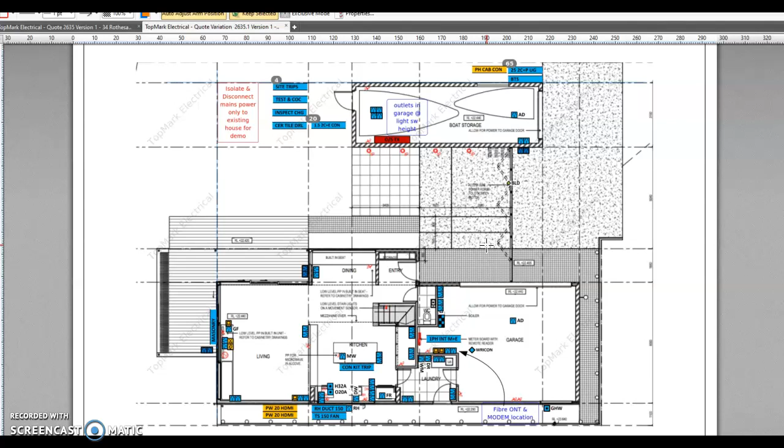So that's the power point layout, nothing to look at there. I'll come back to that floor, but this is the ground floor. Basically, the LED strip lights come on with a sensor. They're wired to the entry so you can turn them off and on, basically as an override. The boat shed is pretty self-explanatory.

When you come into the entry, you've got this light in the entryway switched right at that location, and you have the pendant on a separate switch. What Mark was saying is it's probably not about when you'd have the pendant on or off, it's more about being able to turn the entry light off, because if you're living in the house, you don't always want the entry light on. So there's two switches, one for the pendant, one for the entry. You come in, turn the entry light on, it provides enough light, and you can turn the pendant on if you want.

It's up to you, but you come through there, and then you have these two hallway switches, which are switched to this location with the dining room switches. The reason those are switched to that location is if you're using the kitchen and all the kitchen lights are on, you'll see these lights come off the kitchen light. If you decide to go to bed and start walking up the stairs, this is the closest location to switch these hallway lights off before going up.

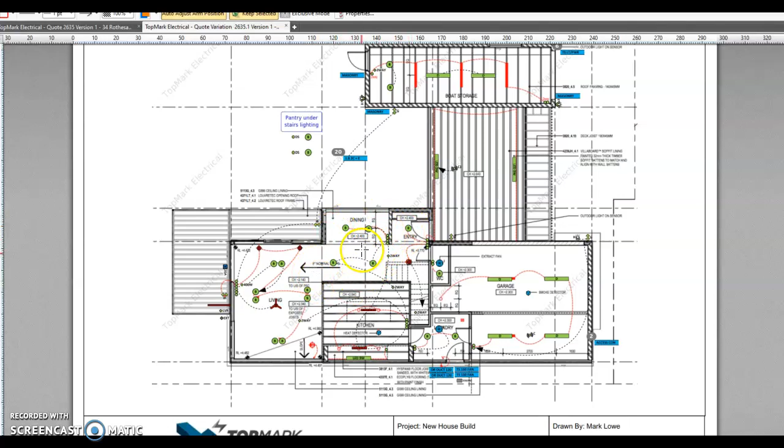The upper floor, I'll just remove some of these notes. Actually, I won't, I'll leave them there. Master bedroom, pretty simple - four lights, switched from this location as well as next to the bed with the wall lights. Now there's only a two-way on this side of the bed.

So at night, whoever's on this side will flick these off and flick all these lights off. At this location too, there's a possibility of adding one more switch for the Econo heat panel, or my suggestion would be to have the switch near the Econo heat panel, maybe hidden slightly behind it. Because you're not really going to turn that on and off manually, there's an app you use, or you just go to where the heater is and flick the switch.

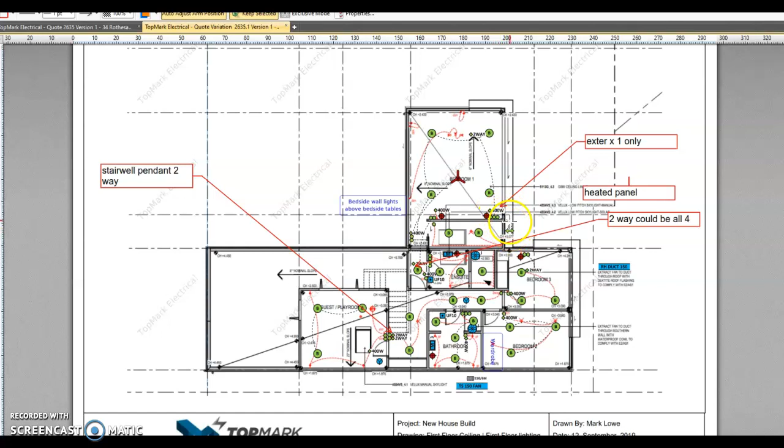I don't think having another switch over here would be the answer, but it's your option. Mark did suggest either or. Wardrobe lights, pretty simple - door slides open, light, bang bang. That's fine. This exterior light's also controlled from this side, so I think that's the logical spot to put it, because you've got a big door in there and I don't think there's any wall space to put it on.

Now I'll just hide that note. The ensuite's fine, bedroom 3 is all good. There's a two-way there because if you do put a mezzanine structure in there, you've got a two-way switch. This bedroom's fine, bathroom's fine. The hallway lights, you've got 1, 2, 3, 4 lights which are on a two-way switch to that point there.

So if you're coming up, you switch them on, walk around, and then have the ability to switch those two-ways off there. So that could be something that you delete. I think just having the switches at this location for the hallway lights - because if you turn the lights on and you're walking through this way, you then have to decide whether you go this way or come down to turn them off. So it's much of a muchness really. That could be something you get rid of, the two-ways in the hallway.

Now the other two-way isn't for the guest playroom, it's for the actual pendant light above the stairs. That kind of leads into what I was saying before on the ground floor. If you have that pendant on its own switch, you could decide to get rid of this two-way and just say, if we turn the pendant on downstairs and it's on, then it's on - if we have to turn it off, we go downstairs and turn it off. Or you keep this two-way in, so you switch it on downstairs, and at night when you're going to bed you can switch that off from upstairs.

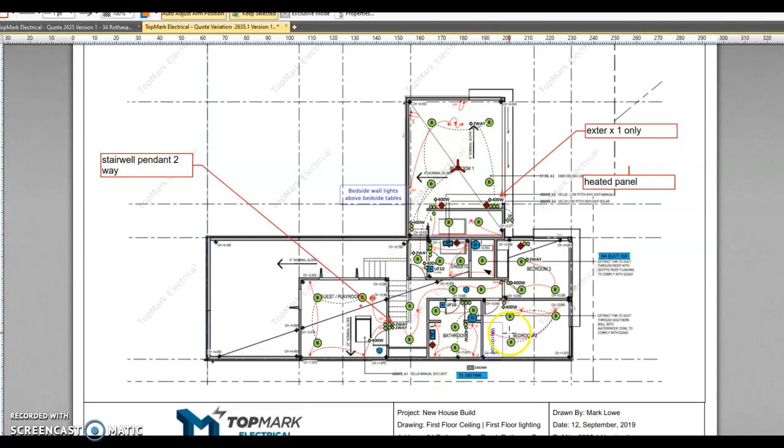And that is it for the lighting, I think that's pretty good. And then obviously you've got the stair tread lights, which are on the sensor - 1, 2, 3, and then there's another one there, 4, 5 sensors. Could drop down to 4, but Mark said for the sake of $120 to have another sensor that doesn't pick up any dead spots is worth it. But look, we could have a look at that, there's no problem with that.

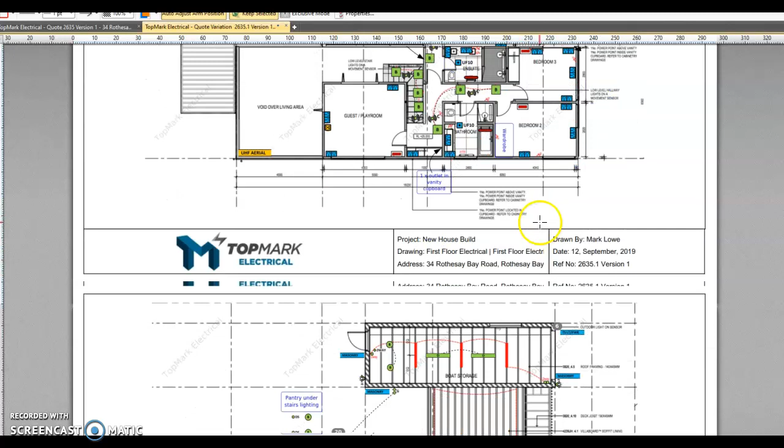And that is about it, so yeah, if you guys can have a look tonight.